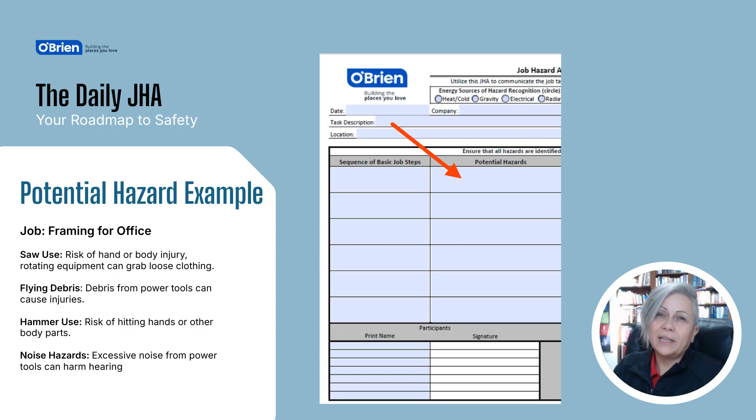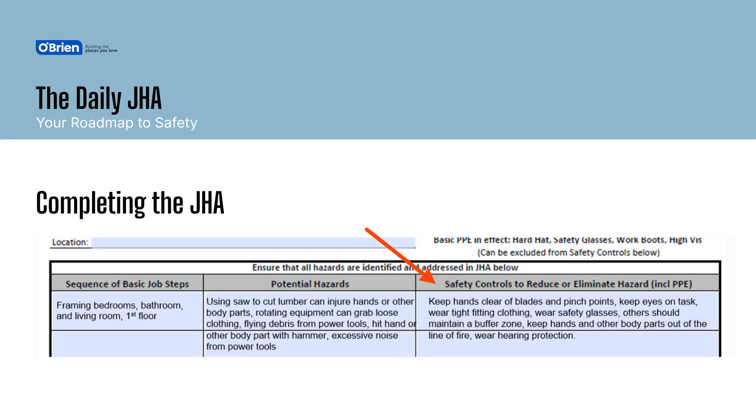The next step is to identify the practices to use to avoid or control the identified hazards and list them in the safety controls to reduce or eliminate hazard, including PPE. For example, continuing the framing job step would look like this.

When you've identified a hazard, the next step is figuring out how to control or eliminate it. One helpful approach is the hierarchy of controls, which provides steps to minimize risk. If you can't completely remove the hazard, here's how you can address it in order of effectiveness.

Substitution: swap out the hazard for a safer alternative. Engineering controls: add physical barriers like guards or interlocks to separate you from the hazard. Administrative controls: adjust how the work is done to reduce exposure to the hazard. PPE, or personal protective equipment: use gear like gloves, goggles, or hard hats as your final layer of protection. The goal is always to use the most effective solution possible, starting at the top of the hierarchy.

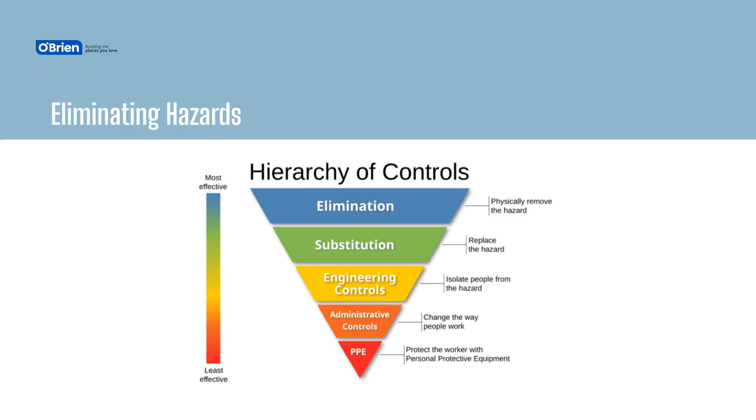Continue the list of job tasks for the day along in the left column, then identify the potential and existing hazards for each task in the center column, then the controls for eliminating or controlling the associated hazards in the right column. Then have everyone on the crew read and sign the JHA.

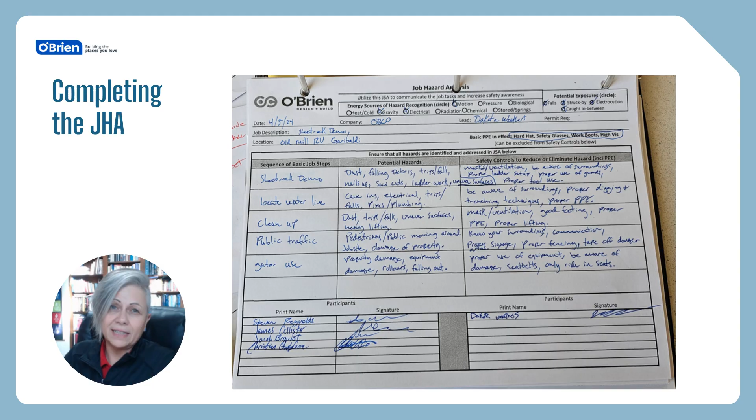The JHA is a living document. If you have any changes or additional tasks that were not identified on the JHA, you are required to go to the superintendent and add the changes before continuing.

Let's talk about personal protective equipment, or PPE, and the responsibilities we all share to ensure it's used properly. First, it's the employer's responsibility to provide all required PPE to their employees. That means you should always have access to the gear you need to stay safe.

Now let's cover the minimum PPE requirements while working on site. At all times, you must wear a hard hat, safety glasses, protective footwear, and high visibility clothing. One quick note on footwear: tennis shoes are not allowed on O'Brien projects, except for roofing tasks. If you need to wear soft-soled shoes for roofing, make sure to note it on your JHA before beginning work.

In addition to the basics, you may need extra PPE like hearing protection, a face shield, or gloves, depending on the task. Make sure you're aware of what's required for your specific job. If you arrive on site without the proper PPE, you will either be sent off-site until you have the required equipment, or, if available, O'Brien will provide PPE, and the sub will be charged for it.

It's not enough to just have the equipment. It needs to be in good shape. All PPE must be clean, safe, and reliable. Inspect your equipment before wearing it to ensure it's in good condition.

One more important note: if you're leaving the ground, you'll need to wear a hard helmet with a chin strap. This includes tasks like working on ladders, lifts, or roofs. By following these guidelines, we're ensuring a safer work environment for everyone. If you have any questions about your PPE or what's required for a task, don't hesitate to ask your supervisor.

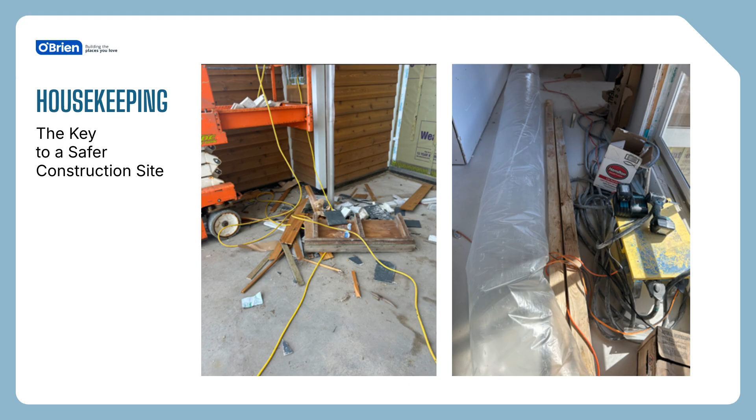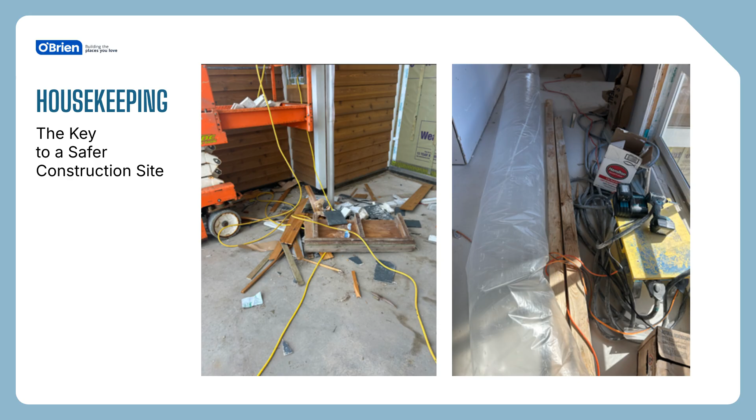Take a look at the images here. They highlight examples of poor housekeeping, which can result in hazards like slips, trips, and falls. Beyond safety risks, poor housekeeping can also lower team morale, reduce efficiency, and even lead to fire hazards or damage to equipment and materials.

If you leave an area in an unsafe or unclean condition, O'Brien will take steps to clean it, and the cost of that cleanup will be charged to your company. In addition, your company's owner will be notified. We can avoid all of this by staying proactive.

Good housekeeping is everyone's responsibility, and it helps us work smarter, stay safe, and maintain a job site we can all be proud of. Remember, a clean site is a safe site.

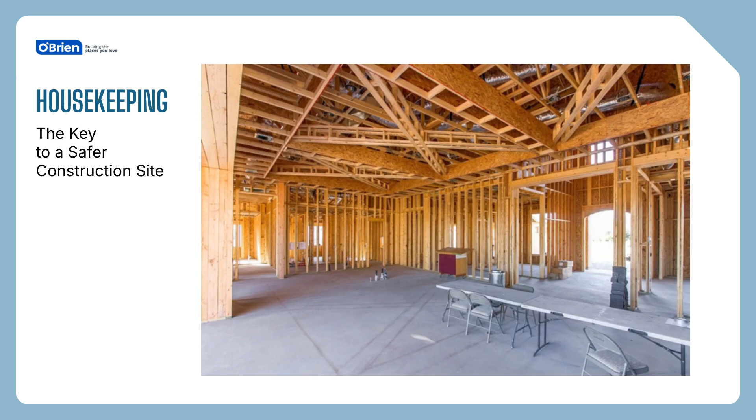When working at heights, 100% fall protection with a rescue plan is required at all times. Here's what you need to know. In Oregon, fall protection is required for heights of 6 feet or greater. In Washington, the requirement starts at 4 feet or greater.

Each employer must provide a competent person on site at all times to oversee fall protection measures. If any fall protection equipment is deemed unsafe, it will be removed or destroyed at the discretion of the superintendent or director of safety. Every employee wearing personal fall protection must be properly trained.

This includes understanding the purpose of fall protection equipment, inspecting it before use, knowing how to wear it correctly, and storing it properly. You may be asked to provide proof of your fall protection training at any time. Failure to do so will result in removal from the site until proof is provided.

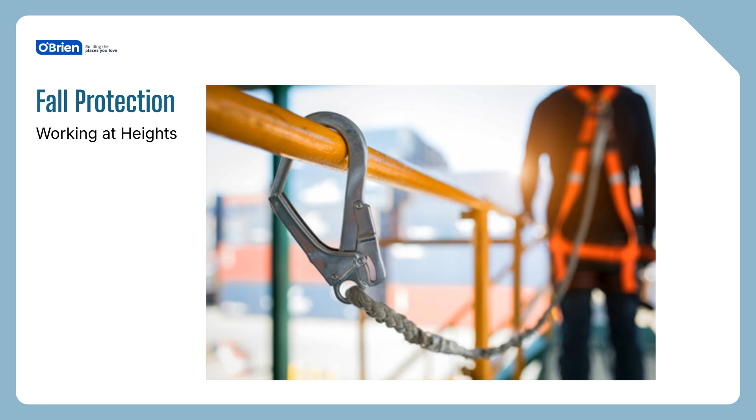Violating the fall protection policy is taken very seriously. A first-time violation can result in immediate and possibly permanent dismissal from O'Brien projects. Why such strict enforcement? Falls from heights are the number one cause of fatalities in the construction industry.

Protecting you and your coworkers is our top priority, and this policy is designed to ensure everyone goes home safe at the end of the day.

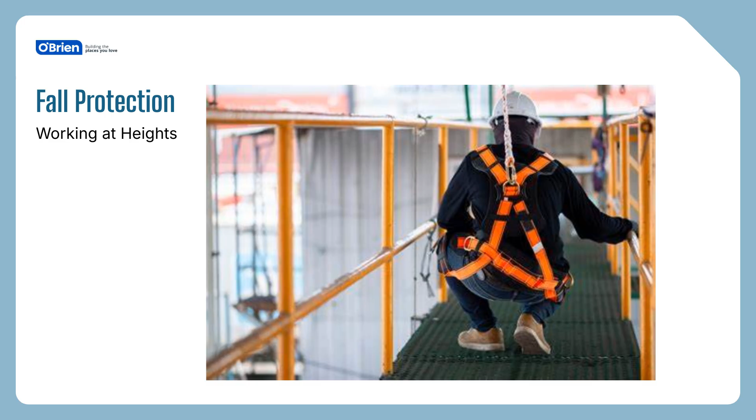Whenever possible when working at heights, we prefer passive fall protection, such as guardrails. Guardrails must be 42 inches high, plus or minus 3 inches. They must include a mid-rail and toe board for full protection.

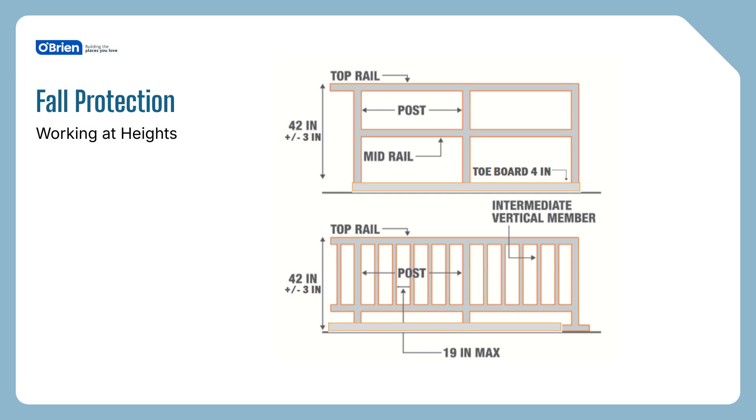Fall protection is mandatory in the form of guardrails or a personal fall arrest system with the use of an anchor, body harness, and a lanyard. Controlled access zones with warning lines are not allowed on O'Brien projects. These measures are essential for ensuring everyone's safety while working at heights.

Let's talk about ladder safety, one of the most important aspects of working safely on a construction site. Following these simple guidelines can prevent accidents and keep everyone safe.

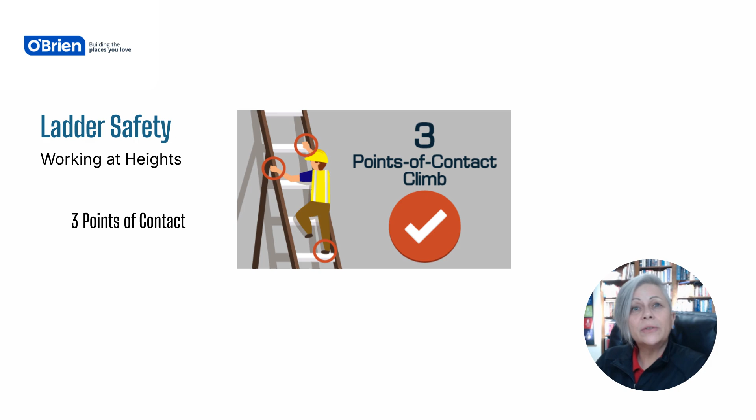Always face the ladder. Whenever you're climbing or descending from the ladder, always face the ladder and maintain 3 points of contact. This means always having 2 hands and 1 foot, or 2 feet and 1 hand, on the ladder. When working from the ladder, use both feet and lean forward so you can work with your free hand and remain in 3 points of contact with the ladder.

Use the belt buckle rule. Do not overreach. Keep your belt buckle within the sides of the ladder to maintain balance and avoid tipping it over.

Secure the ladder. Ladders must be secured at both the top and the bottom to prevent movement while in use. When using an extension ladder, ensure that it extends at least 3 feet above the landing it provides access to. This gives you a secure area to step off and on safely.

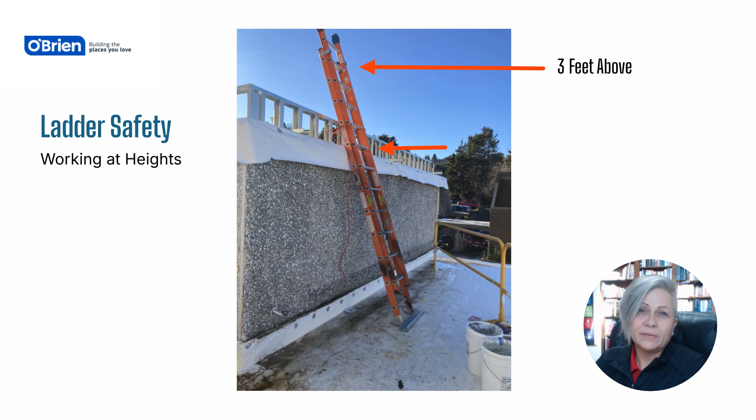Make sure to have the correct ladder angle using the 4-to-1 method. For every 4 feet of height, place the base of the ladder 1 foot away from the wall or structure. To test the angle, place your toes at the bottom of the ladder. With your hands outstretched, you should be able to reach a rung comfortably without bending your arms or leaning forward.

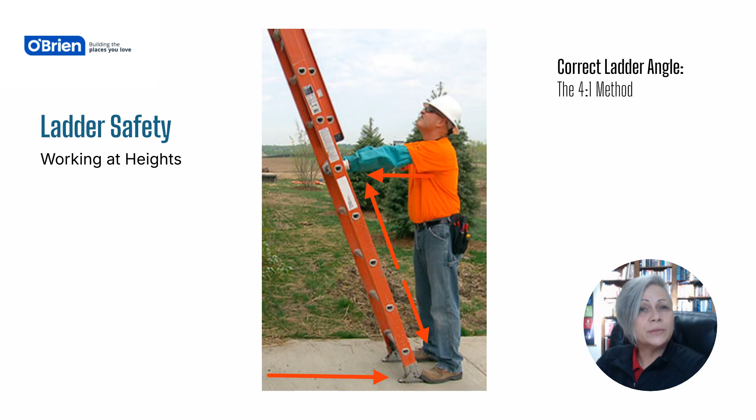Inspect the ladder before use. Before using a ladder, inspect it for cracks, damaged rungs or rails, missing screws or rivets. If you find any damage, do not use the ladder.

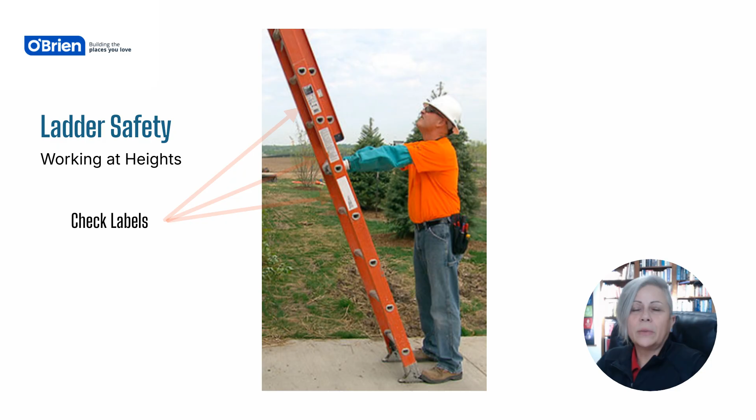Check labels. Ensure that all labels are present and legible. These labels often include important safety information and warnings. Now let's discuss the proper use and safety guidelines for stepladders.

Adhering to these rules is essential for preventing injuries and ensuring a safe work environment. A stepladder must never be used to access another level or surface. Always remember, a stepladder is considered a working platform, not a tool for climbing between heights.

The top step and cap of a stepladder should never be used as a step. Using these areas compromises your balance and safety. Ensure the spreader bars are fully extended and locked into place before using the stepladder. This provides stability and prevents the ladder from collapsing.

Before using the stepladder, inspect it carefully for any signs of damage. Look for cracks, damaged rungs, or rails. Check for missing screws or rivets. Do not use a ladder that is damaged in any way.

All 4 feet of the stepladder must be firmly on the ground. Avoid placing the ladder on uneven or slippery surfaces. Always face the ladder while climbing and maintain 3 points of contact. This means having 2 hands and 1 foot, or 2 feet and 1 hand, on the ladder at all times.

Follow the belt buckle rule. Keep your belt buckle centered between the ladder rails. Do not overreach or lean too far to either side. Ensure all labels on the ladder are present and legible. They provide important safety information and instructions.

Following these stepladder safety guidelines will help you work safely and efficiently. If you encounter any issues with a ladder, report them immediately to your supervisor. Ladders are a key tool on our job sites, and using them properly is essential for safety.

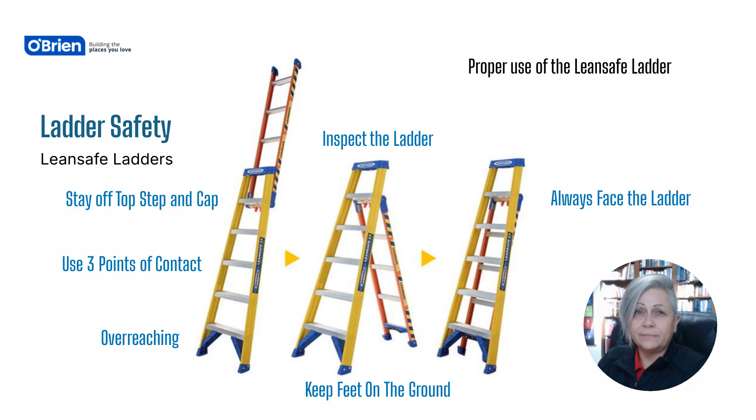Power tools are essential for getting the job done, but using them safely is just as important as using them efficiently. By following a few key safety rules, we can protect ourselves, our coworkers, and our job site from preventable accidents. All power tools must have proper working guards.

They are there to protect you. Saw guards must remain in place and should never be pinned back. The ground plug must never be cut off and should only be repaired using original manufacturer's replacement parts. If a power cord is damaged, it can create serious risks. The entire pigtail must be replaced by a certified electrician.

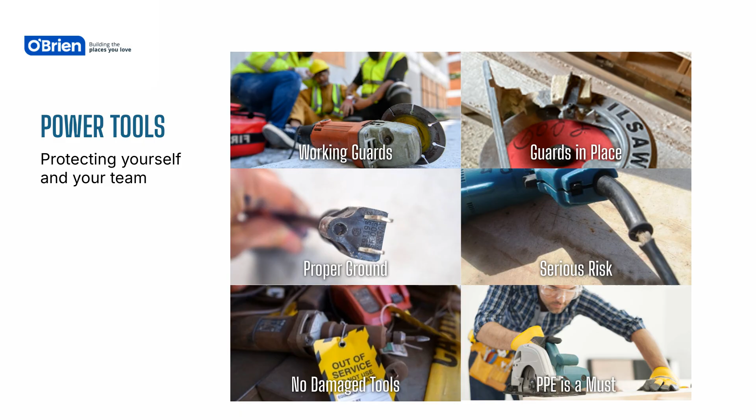If a tool is damaged, defective, or unsafe, it must be removed from the site immediately, no exceptions. When operating power tools, gloves and safety glasses must be worn at all times. By taking these simple precautions, we can keep our tools in top shape and our work sites safe.

Electricity is a powerful tool on our job sites, but improper use of cords can create serious hazards. By following a few simple guidelines, we can ensure a safe and efficient work environment for everyone.

Best practice is to always inspect and maintain your cords, and read the labels. Extension cords cannot be connected together or daisy-chained. Always use a cord of the correct length to avoid overload and fire hazards.

Damaged or modified cords are a risk to everyone. They must not be used on the site. All power for construction must be protected by a GFCI branch circuit. This prevents electrical shocks and ensures compliance with safety standards.

Cords should never be mounted with nails or staples, as they can pierce the insulation and create a fire or shock hazard. Instead, use zip ties, insulated staples, or other non-metallic fasteners.

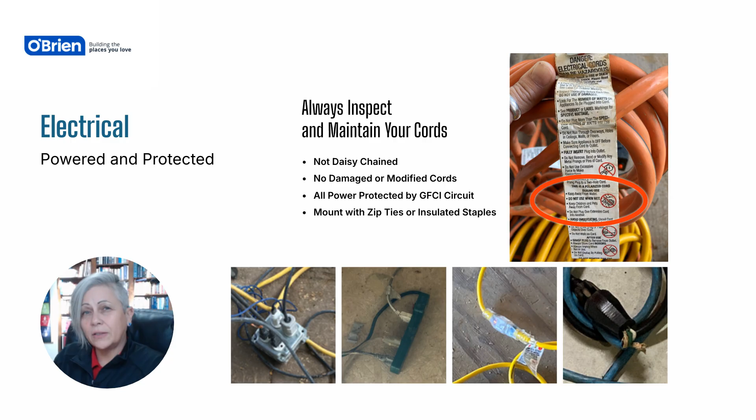If an extension cord is deemed unsafe, it will either be removed from the site or destroyed at the discretion of the superintendent or director of safety. By following these best practices, we can prevent accidents, protect our equipment, and keep our job site running smoothly.

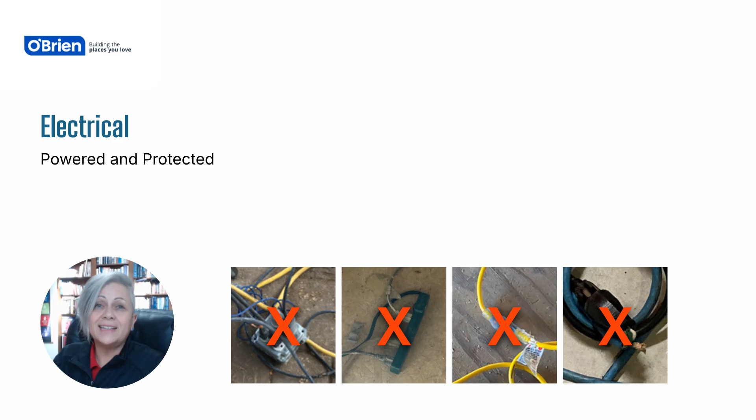Scaffolding is an essential tool for working at heights, but it must be properly inspected, maintained, and used correctly to keep everyone safe. Let's review some key scaffolding safety guidelines to ensure a safe and productive job site.

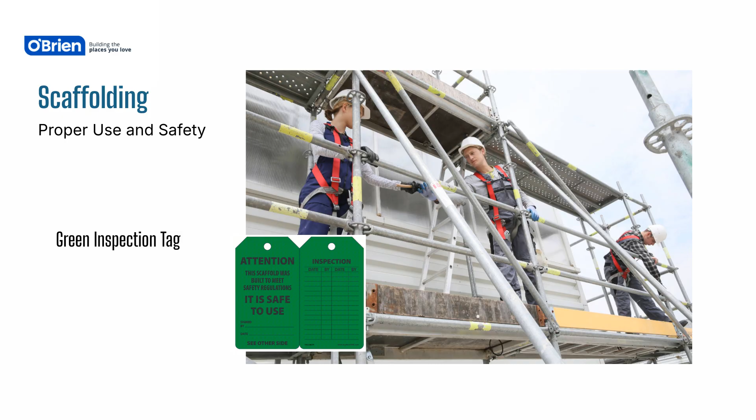A competent person from the subcontractor must inspect and certify all erected or mobile scaffolding at the start of each shift. A green inspection tag must be attached to the scaffolding. It should be placed within eyesight of the ladder leading to the next level and must be filled out daily.

Training is required. Every worker using scaffolding must be trained in scaffolding safety. Never overload scaffolding planking. Exceeding weight limits can compromise structural integrity and cause collapse.

Use only approved scaffolding components. Makeshift or non-standard parts can lead to instability. Follow the manufacturer's instructions. Proper setup and use ensures scaffolding remains safe.

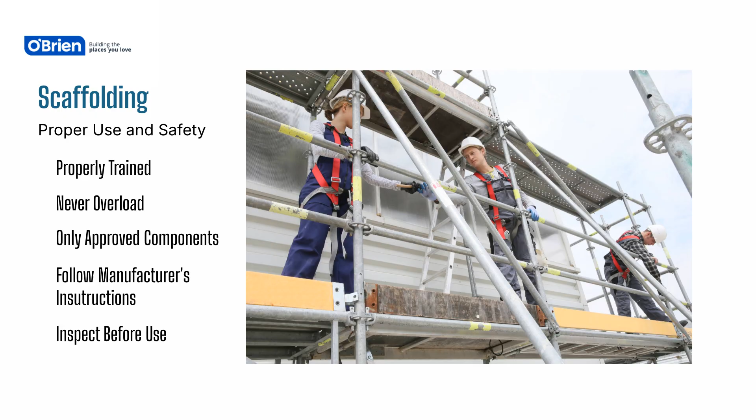Inspect before use. Check to see if any scaffolding components are damaged. Proper planking must be in good condition and pushed together to eliminate any gaps. Any concerns or modifications should be immediately reported to the O'Brien superintendent for review.

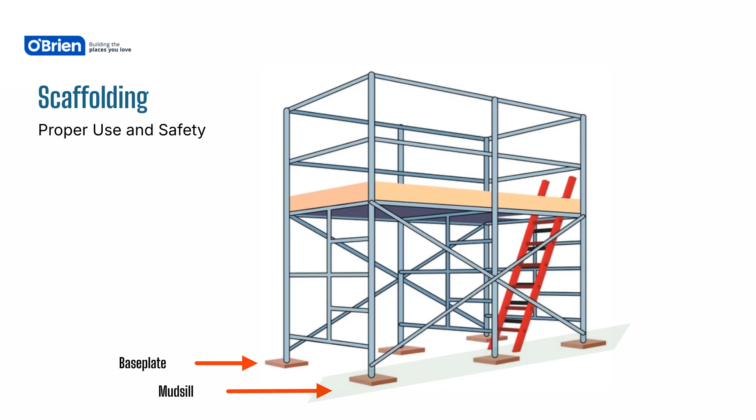Never use unstable objects like bricks or boxes to support scaffolding. And never walk under scaffolding. Base plates must be centered on a mudsill and secured on 2 opposing sides for a firm foundation.

Use guardrails, handrails, toe boards, or debris nets to protect against falling objects. If a guardrail is not present, you must wear a personal fall arrest system. Use catch platforms or canopy structures to deflect falling objects and keep workers below safe. Install netting to catch anything that falls, preventing hazards to workers and bystanders.

By following these scaffolding safety guidelines, we reduce risks, prevent falls, and ensure a secure work environment for everyone.

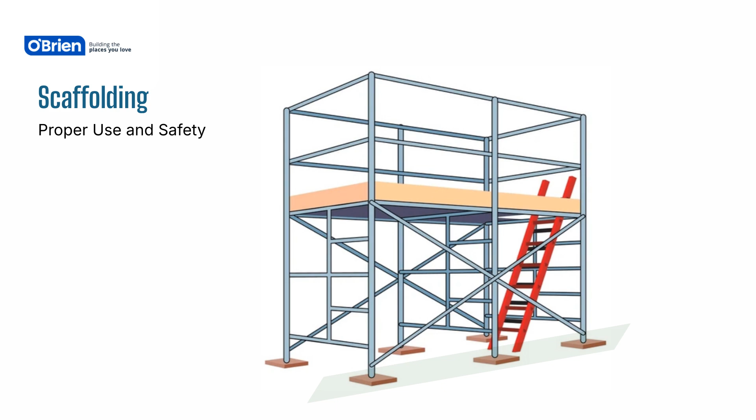Now let's review the essential basic safety rules that apply to every job site. These guidelines are in place to protect you, your coworkers, and the integrity of our projects.

Weapons and violence. Safety starts with respect. Weapons and any form of violence are strictly prohibited on our job sites. If you see any threatening behavior, report it immediately. We foster a culture of teamwork and professionalism, and there is no room for hostility.

Music and earbuds. We all enjoy music, but on a job site, communication is key. Earbuds are not allowed. Music should never interfere with communication, and superintendents reserve the right to ban music completely if it becomes a distraction. If you need to hear instructions, warnings, or signals, you must be fully aware of your surroundings at all times.

Dress code. Your safety starts with what you wear. The following attire is not allowed: sweatpants, tank tops or sleeveless shirts, shorts, torn or tattered clothing. Wearing proper work attire helps protect you from hazards, debris, and potential injuries. Ensure you dress appropriately for the job and wear all required PPE, personal protective equipment.

Fuel storage. If you work with fuel cans, they must be made of metal, properly labeled, equipped with a spark flame arrestor. Improper storage or handling of fuel can create dangerous conditions, including fires or explosions. Always follow the correct procedures.

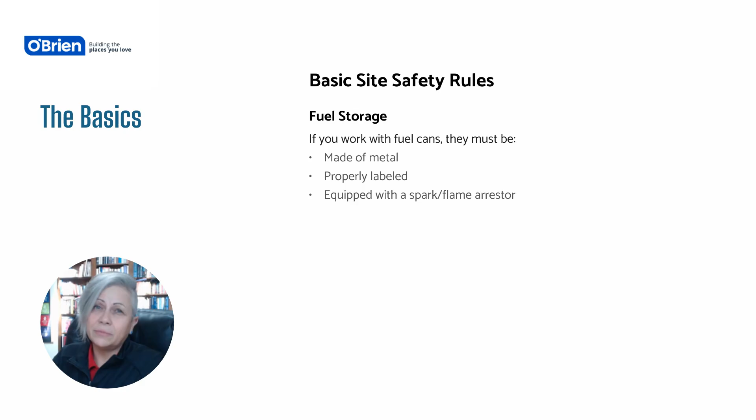Storing hazardous materials. Any hazardous material must be stored properly and accompanied by a safety data sheet, SDS. The SDS provides critical information on handling, exposure risks, and emergency procedures. If you're ever unsure about a material, ask a supervisor or consult the SDS before use.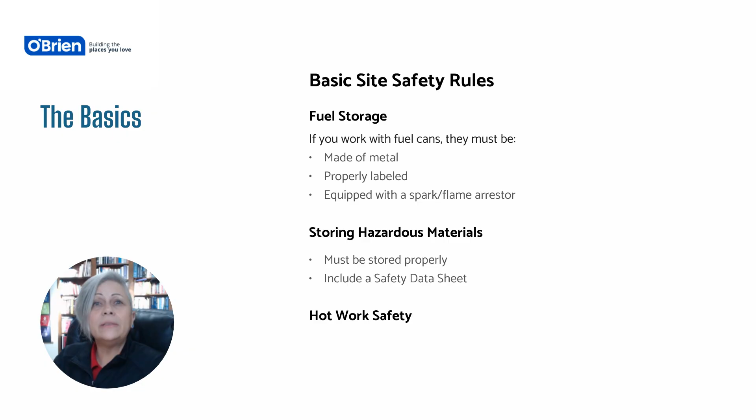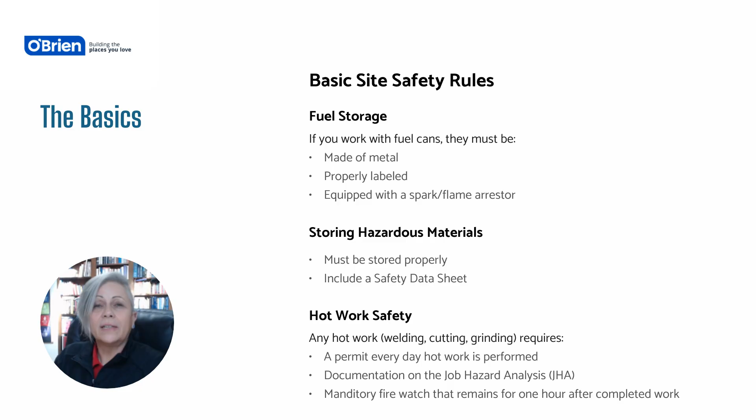Hot work safety. Any hot work such as welding, cutting, or grinding requires a permit every day hot work is performed, documentation on the job hazard analysis, a mandatory fire watch that remains for at least 1 hour after work is completed. Fire hazards can arise long after the work is done, which is why the fire watch is so important. Never leave an area unattended if hot work has just been performed.

Fire safety and fire extinguishers. Fire safety is everyone's responsibility. Fire extinguishers must be within 50 feet of all flammable materials. The maximum travel distance to a fire extinguisher must not exceed 75 feet. Fire extinguishers must always be readily available, visible, and unobstructed. Know where the nearest fire extinguisher is at all times. If you ever need one, every second counts.

Accidents and incident reporting. No matter how small an injury may seem, report all accidents and injuries to the project superintendent immediately. Delaying reports can put others at risk and prevent proper documentation. Quick action can prevent minor issues from becoming major problems.

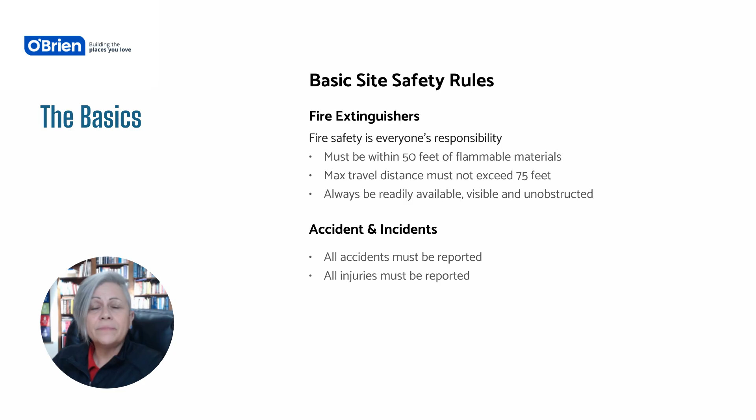Thank you for attending the O'Brien Site Safety Orientation. Safety is a shared responsibility. It requires vigilance, cooperation, and a proactive approach from everyone.

By adhering to these safety measures, you contribute to creating a work environment where we can all perform our best without compromising our health or safety. We encourage you to actively participate, ask questions, and voice any concerns you may have. Together, we can foster a culture of safety and ensure that our work sites remain secure for everyone. Now go out there and have a great and safe day.